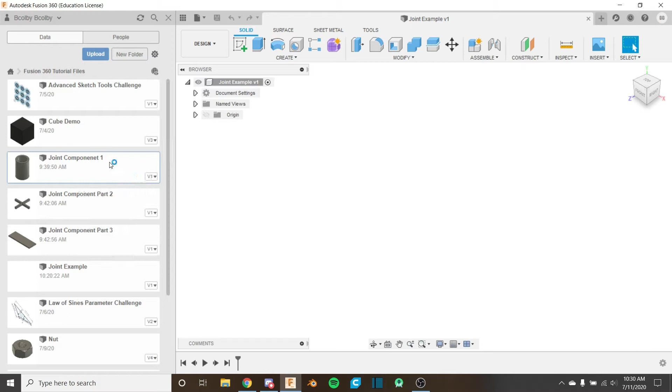The way that I bring these into this file is I right click on them and do insert into current design. It gives me some options about where I want to place it. I'm just going to leave it at the origin for now, and I'm going to click OK. Now you'll notice that we have a component here. It's not under the bodies drop down or anything.

But if we opened up this file, you would notice that this is a body in fact. So when you save a file and you insert it into another file, it automatically becomes a component. If I changed this body here, if I made it taller or shorter, there would be a way to update it in this example. We'll be getting more into how to manage components and sub-assemblies in the assembly tutorials. But for now, let's just stick with this.

So the next thing I'm going to insert is this joint component part 2, and I'm just going to drag that out so we can see it, just like that. And now let's talk a little bit about what joints are. You may or may not be familiar with the concept of joints.

So basically, when you're creating a robot, for example, you need everything to stick together on the assembly. You need all the parts to be together in a realistic fashion, and that's not always just making them rigidly connected together. Sometimes you want movement, sometimes you want it to rotate, sometimes you want it to slide, and this is a way of creating those realistic interactions between different components.

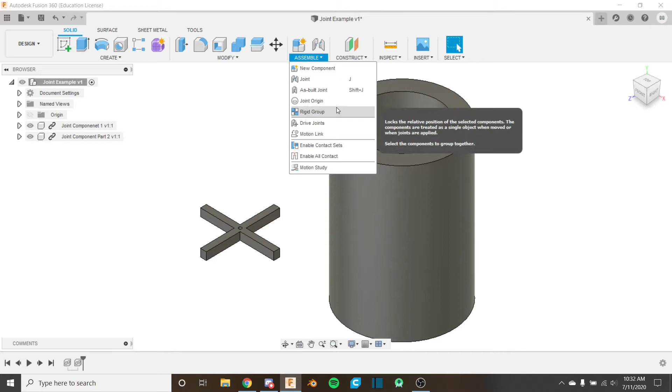So we're going to be looking at 4 joint tools today: the joint, the as-built joint, the rigid group, and the ground, which is not in this menu, but it's inherently tied into joints.

I'm actually going to start with ground, and what ground does is basically lock a component's position and rotation. This can be important. For this, I want my cylinder to be locked in place, and this is going to be our moving piece. We can pretend this is maybe welded down onto the ground or something.

The way that you do that is you can double click to select the component, right click, and press ground here. Then you'll notice it has this little pin icon here. You can also right click here, and if I clicked unground, it would be ungrounded again.

So if I ground it and I tried to move it with the move tool, you'd notice that if I put this on components, I couldn't select this one, but it would let me select this one. If I ungrounded this, I could select it and move it.

So that's it for the ground. It's really simple. You should really only ground one part in the assembly if everything's connected. Just ground the piece that makes the most sense if you need it.

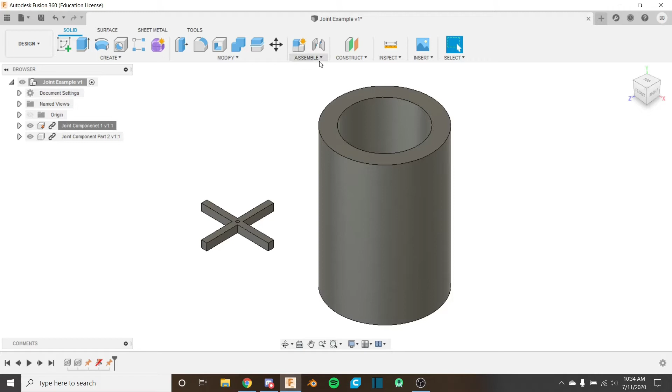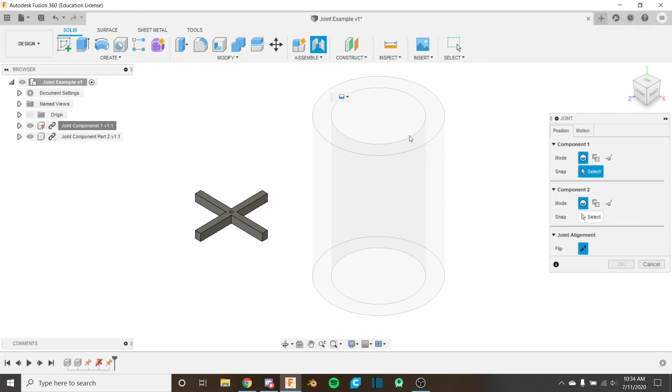Let's start off with joint. So I'm just going to do the joint tool right here. The command is J, and it's here, up here, and it's down here. So the first thing that it asks for is component 1, and component 1 is going to be the one that's moving. So you always have to remember component 2 is the rigid one, and component 1 is the one that's moving.

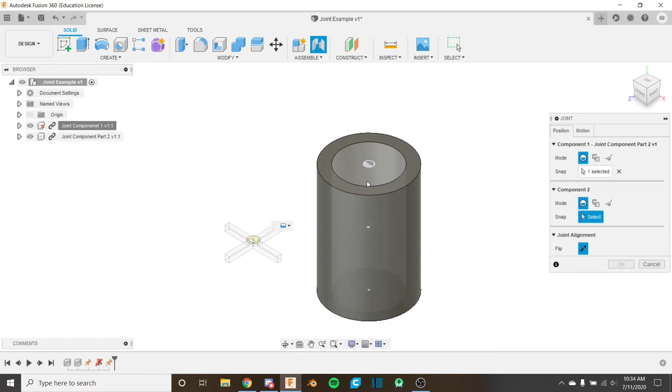So I'm going to select, when you hover over this you can see some points, and these are just points of selection. I'm going to select here, and you'll notice that it's snapped there with the yellow sort of circle thing to the center, and that's right where we want it. It's the center of the circle. Now we can select a point to snap to here. Again, I'm going to select the center of this circle, and now you'll notice it's brought it over and it's doing some sort of shaking animation.

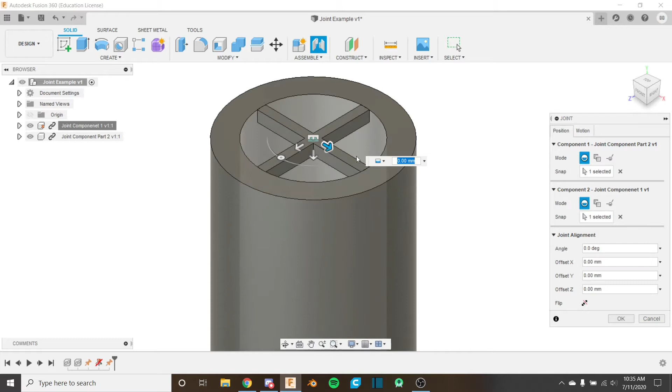So let's take a look. There's a lot of stuff here. It's really not that complicated. These options here, the simple mode is just the one I use the most to select components and where to align them, but sometimes it can be useful to use the between two faces and two edge intersection tool.

This is pretty easy, especially in their picture here. You can see that they have a sort of filleted part, and if you want to align the corners of a filleted part with a non-filleted part, for example, you wouldn't be able to select it there, but if you use the two edge intersection tool, you would be able to. And you'd be able to select the edges that define the fillet, and then it would give you the point in the corner. But really, the simple is mostly what you need in FTC, as the selections are quite simple and the geometry isn't too complicated.

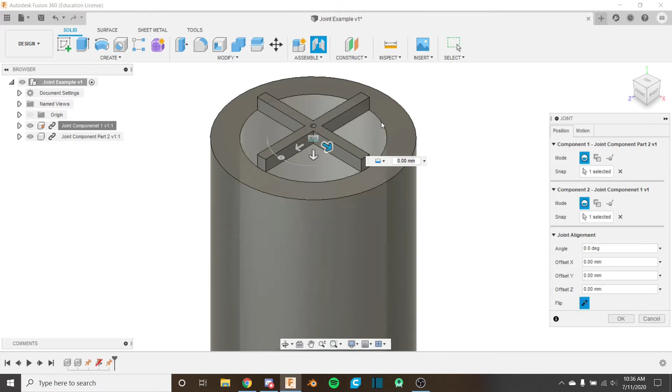So the first thing that we're going to look at is the joint alignment tool. So we have some options here. So flipping it, we'll flip it over the XZ axis, which we defined on our point. So our point that we are snapping to is on the XZ axis, so it's flipping it over just like that. You can see it goes down and it goes up. So it's important to make sure that your piece is on the right side. I'm going to have mine down below like this.

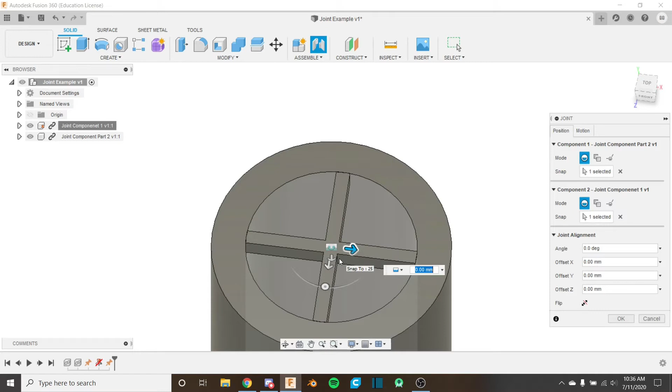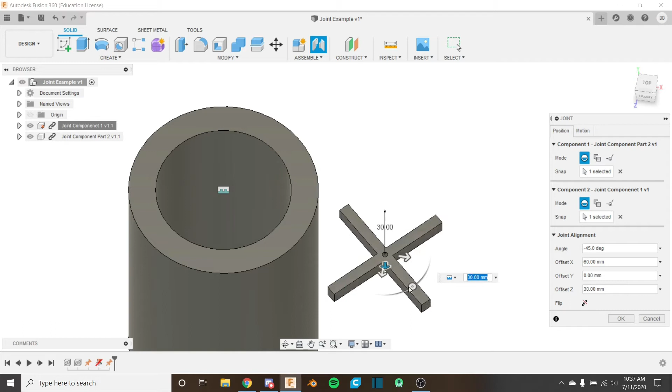Then we just got some angle, and this adjusts the angle around the point that you're snapping to. Just like that, you can change the angle. So if I want mine at 45, I put it at 45. And then the offset X, Y, and Z allows you to offset the part. And now it looks like these two wouldn't be connected, but in fact, we still have a rigid connection between them, even though we've offset it. So I'm just going to put this back at 0 and 0, and we have it back there.

So let's take a look. When we first animated that, it gave some sort of shaking thing, and that's because we have the rigid joint selected, and this means that there's a rigid connection between these two components. You can always just click here in the animate to preview how the joint is going to work. When you're using a joint tool, you select the type of joint by clicking on these options down here. That's basically it. So we're starting with the rigid. By default, it's rigid, and we've just got a rigid connection between these two joints.

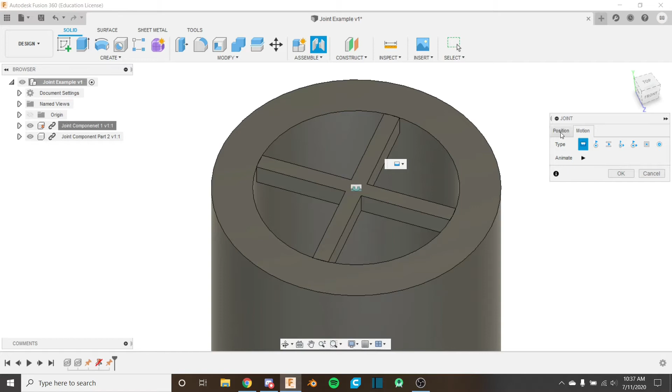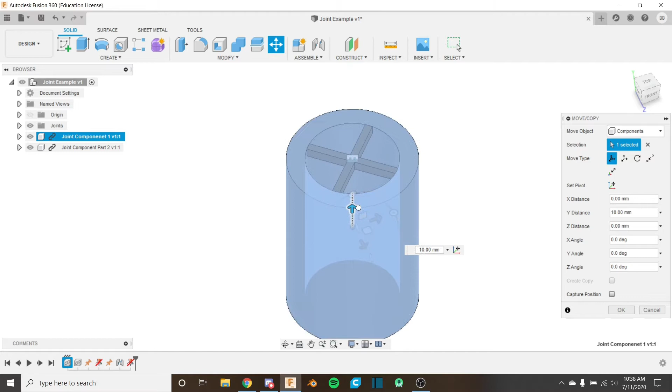So if I click OK, you'd notice a few things that would happen. One, we've got this sort of white and blue puzzle piece thing here, and we got another drop down over here. So I'm going to unground this for now, and we're going to take a look at what happens if I move the cylinder here. You'll notice that it's moving together and it's staying at that point. And because we've used a rigid joint, the position and angle is now locked in.

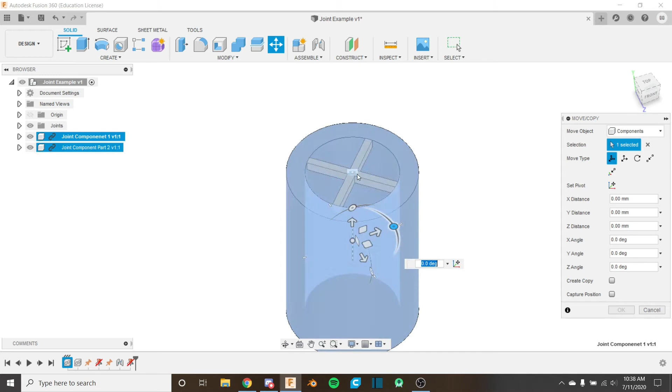So if I rotated it, you'd notice that both the cylinder and the little X thing are rotating together. So that's what the rigid joint has done. We've defined a rigid connection at the points that we specified and at the position and angle we've specified, just like that. And you can hide the joints by just clicking here, and you can also look in the drop down here to find the joints individually and hide them.

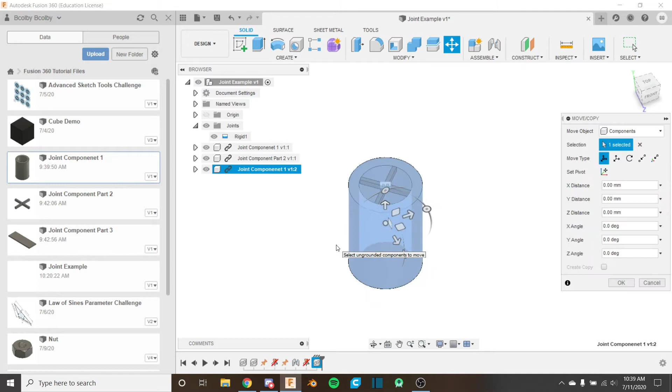Next, let's take a look at the revolute joint, and I'm going to add some more components in to use for this one. We don't want them to be on top of each other, so I'm just going to move them over just like this.

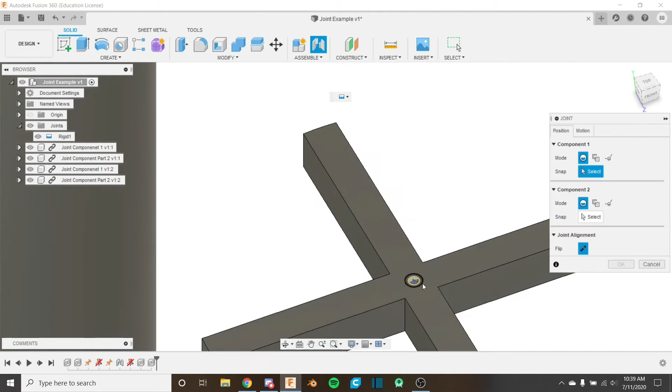And you're going to be doing this a lot if you have robot assemblies, getting your pieces in together with the insert component. Same thing, I'm going to select joint or press J. I'm going to select the center of this, the center of this.

Instead of doing the rigid joint, I'm going to go to motion and change this to revolute. And we have an option here. Right now it's rotating around the Z axis.

There are some things we could change about this. We could change the rotation, so now it's rotating like this. And now we also have this axis.

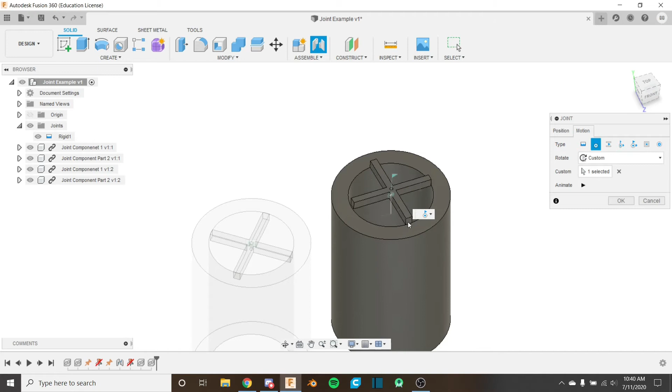You can also use a custom axis, and for this you'd have to select an axis to use for the rotation. So if I selected this, for example, it would be rotating around that, and it's kind of like moving up and down. That's because the axis isn't going straight through.

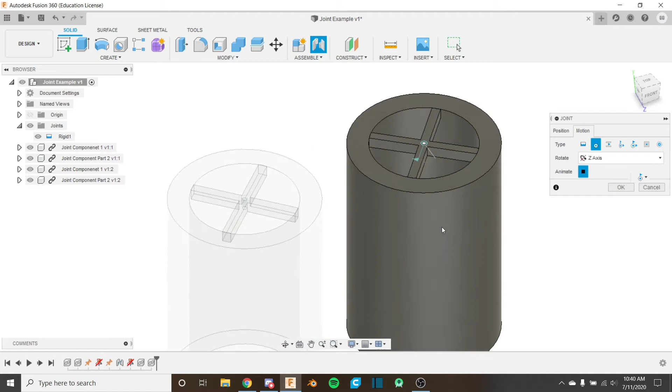You may have noticed, why when I select Z, it's rotating like this, but the Z-axis is facing this way. Isn't this the Y-axis? If we look from the top, isn't this the Y-axis? That's because this is for the part, which is the Z, X, and Y for the individual part.

So just like that, you can use custom axis or construction axis. We learned about how to do that. And that's the revolute joint. Again, you can do the offsets and it still works, just like this.

If I went to motion and animated it, now we're rotating around like this. It's not rotating in place off to the side here. So you can use the offset tools and get the rotation correct. If there's no offset, it's going to be rotating the part and it's not going to be orbiting at all.

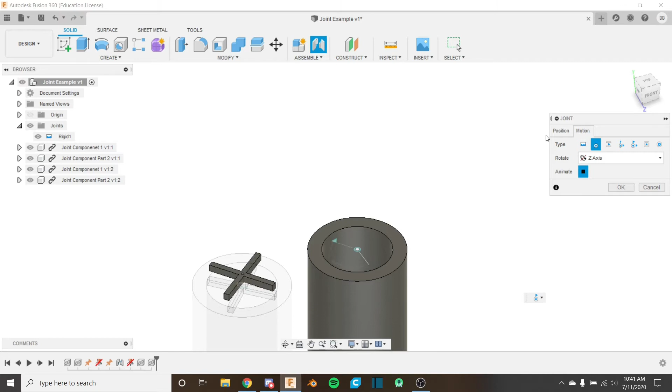So I'm just going to put this back on 0 and 0, just like that. And we click OK, and now we have our revolute joint.

Let's say you wanted to preview this joint motion again, there are some ways you could do it. If I right click here and click drive joints, I can actually specify the angle for this joint to be driven, and that will change it in the model.

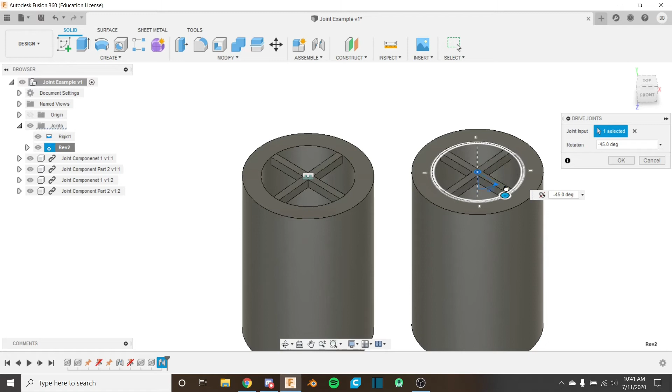So if I went -45, it would actually change it just like that. If I went Control Z, it would snap it back. That's one way to see the joint working.

If we did animate joint, you would see it rotating, and if you did animate model, you could also see it rotating. The difference between animate joint and animate model is animate joint only shows the movement for that joint. If I had something rigidly connected on top, animate joint would just show this thing rotating around. If I did animate model, it would include all the joints in the model and how they interact.

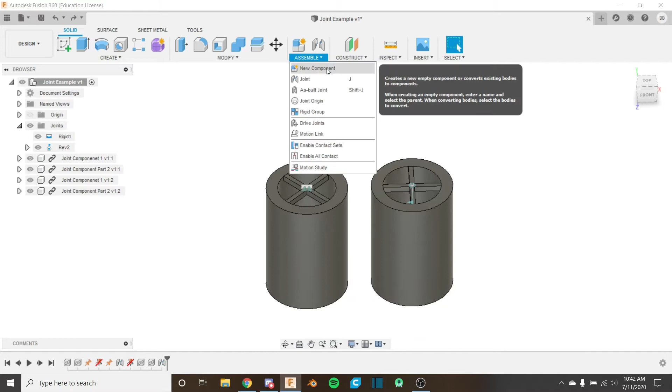Next, let's take a look at the slider joint. So I'm going to bring in some new pieces, bring them over just like that, and bring in our part 2, bring it over just like that.

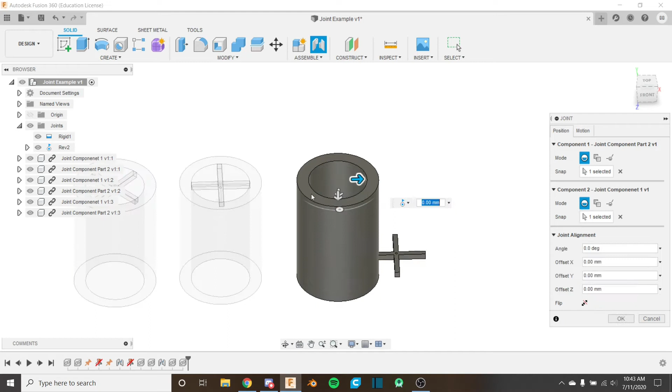I'm going to hit J for joint, and I'm going to select the center of this piece as the piece that's going to be jointed, and this piece here for defining the joint. It's still on rotate or revolute, so I'm going to change it to slider here. What the slider does is it moves it up and down along an axis.

So we can change the axis here for it to move along. If we selected X, it would move this way. If we selected Y, it would move front and back like that. And again, you can use a custom axis for it to slide along.

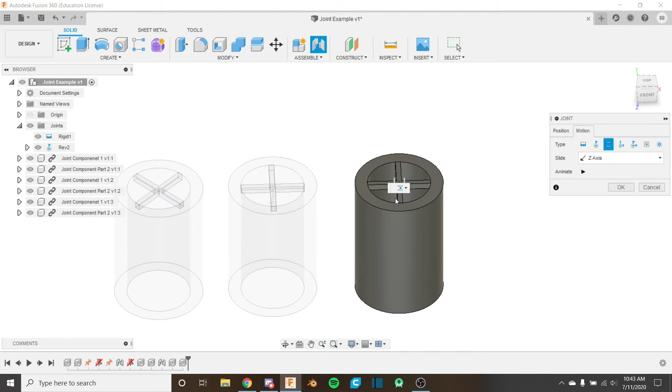But I'm just going to keep it on the Z right now. I'm going to have it sliding up and down this cylinder. Again, we have our same tools for the offset and the angle and the flip. Flip, we know how the angle works. If we do the offset, nothing strange is going to happen here.

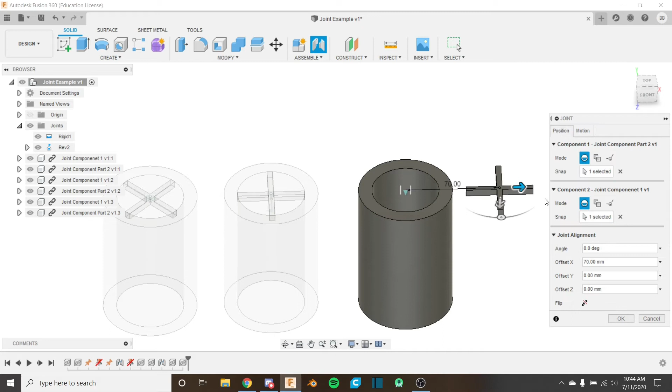It's just going to move up and down to the left and the right, or the front and the back, however you do it, just like that. And we can bring it back to 0, because I want it sliding up and down this cylinder. I'm going to click OK, and now we have our slider joint.

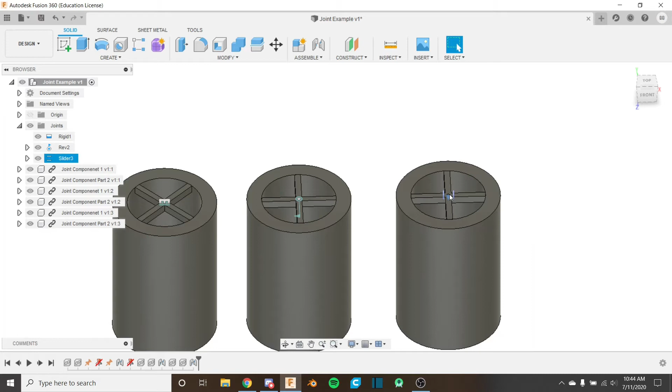You may have noticed that each joint has its own special symbol that you can see. You should get familiar with those symbols so you can quickly see which joints are where on an assembly. The sort of puzzle piece is a rigid one, the flag is a revolute, and the down arrow with white bars on either side is a slider.

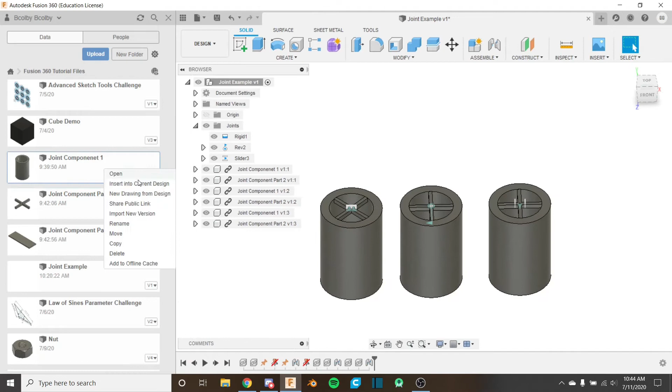Next, let's take a look at the cylindrical joint. I'm going to bring in some more pieces here to work with, just like that. This can also often be a monotonous process, bringing in all the pieces to work with, as it's quite slow and you have to go through the menu and find where you've saved all your pieces.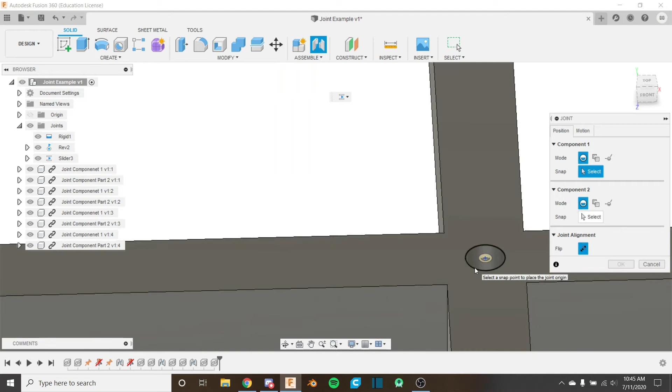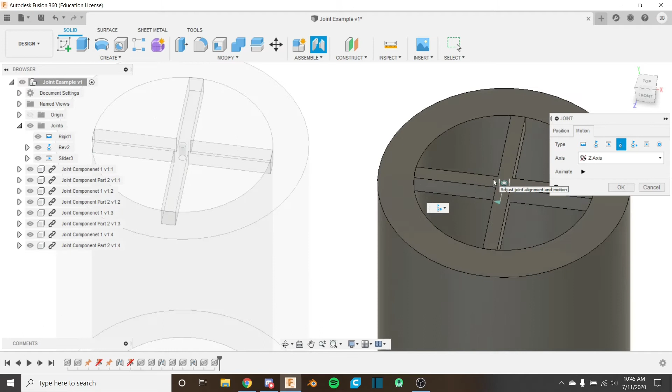So again, J for joint, click there, and I'm going to select this and this as always. For the motion, I'm going to change this to cylindrical. Now you'll notice this is our first combination joint, which is really just a revolute and a slider combined. You can see that by the symbol here - you've got the slider white lines with the arrow pointing down, and the revolute flag. We can see for this one that there's only one axis you can choose, meaning the axis of rotation and the axis of sliding is the same. That's what it is for the cylindrical joint.

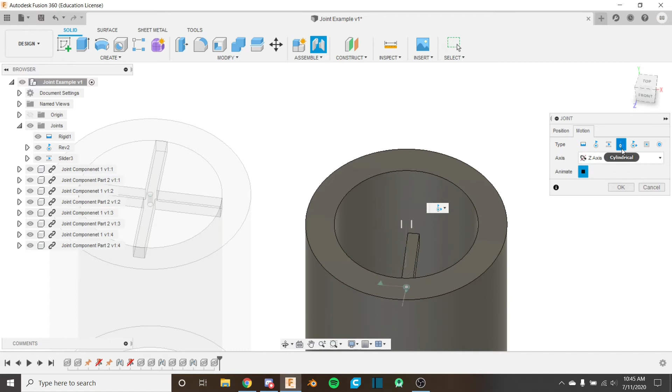The pin slot, which we'll be looking at next, these are different. So if I change this to Y, it would move along the Y and it would rotate along the Y. Again, we have our X, Y, and Z and custom. I'm going to leave this right there, and we have it like that.

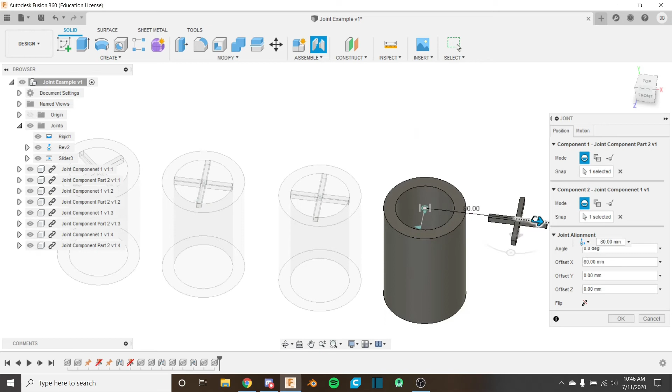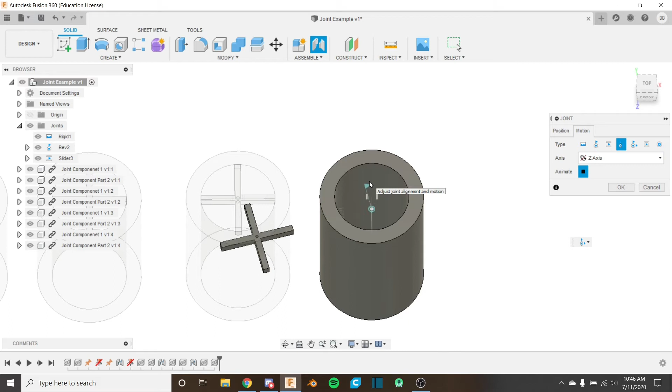Now, if I offset it, we can take a look at how the joint behaves. What you'll notice is that if we look from the side, we can see that it's sliding up and down, and we've got that orbiting, rotating movement going on. So whenever you're offsetting a revolute joint from the center point, you can sort of think of this as like a planet rotating around a star or something. So I'm going to stop that, and bring it back to 0 in the middle. Now we have a few more joints to look at.

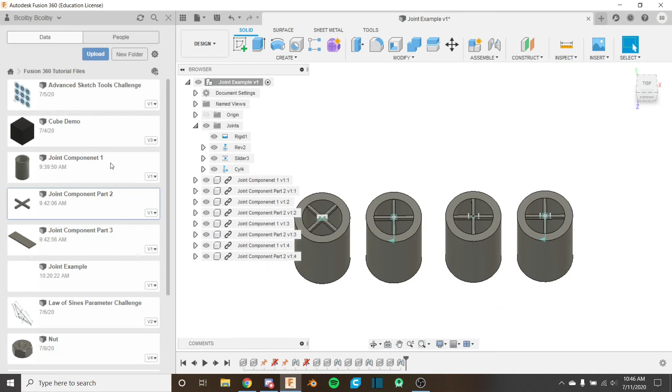I'm going to bring in my parts again, just like this, slide them over. And let's take a look at the pin slot joint.

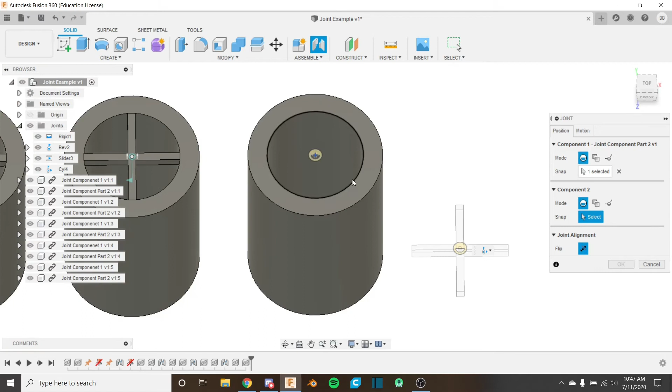This one's similar to the cylindrical joint, except that the axis of rotation and the axis of sliding is different. But again, it's a combination of the rotate and the slider. So if we hop over here into pin slot, what you'll notice is now we have two different axis selection menus here. Since this one is on Z, the rotate is on Z, it will not let me choose Z here. This is because you basically can't make the pin slot behave like a cylindrical joint - the axis has to be different from the rotate and the slide on the pin slot, and it has to be the same on the cylindrical. So it's something to remember - if you're ever like, why can't I select the Z here? It's because you're in pin slot, not cylindrical.

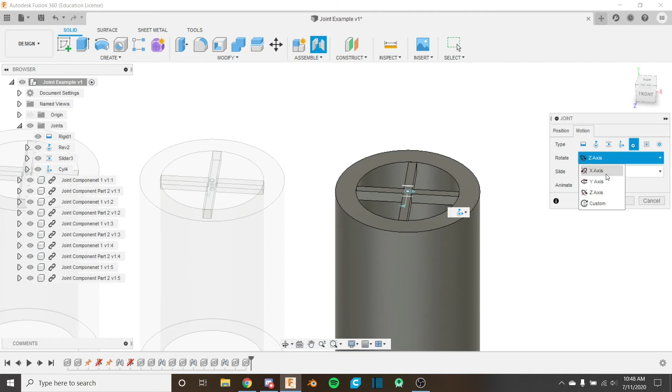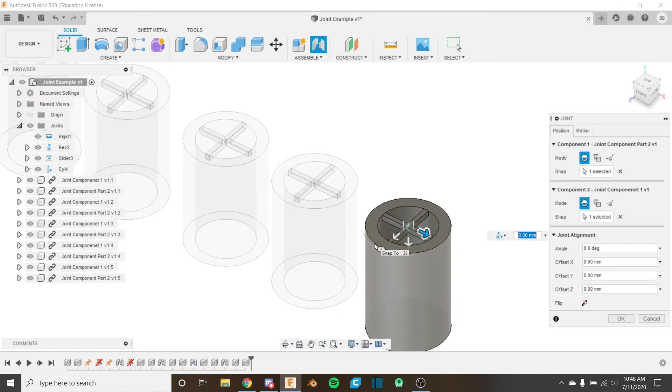So if we take a look at what will happen if we are sliding on the X and rotating on the Z, it's about as you'd expect - we're just moving left and right and going like that. So what I want mine to do is go up and down and rotate sort of sideways. So for the rotating, I'm going to choose X, and the sliding on Z. If we preview that, you can see that it's moving up and down, and it's rotating like this. It's a pretty complicated joint with the varying axes. Again, we have our offset tools, we know how all of that works. I'm just going to click OK, and now we have all of this.

So the next joints we're going to be looking at are the planar joint and the ball joint, and these are pretty complicated. I don't think I've ever used them in an FTC robot, but it's good to know how they work. Especially the ball joint is really complicated.

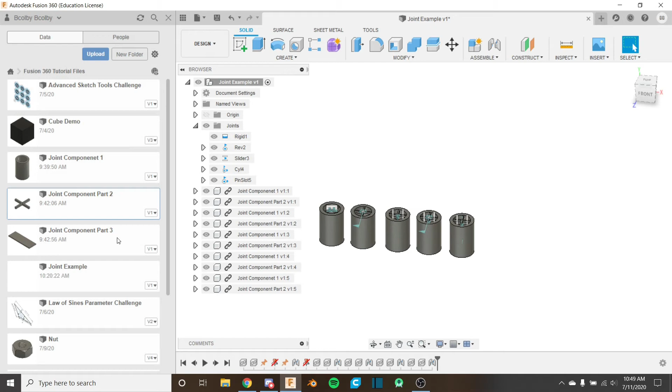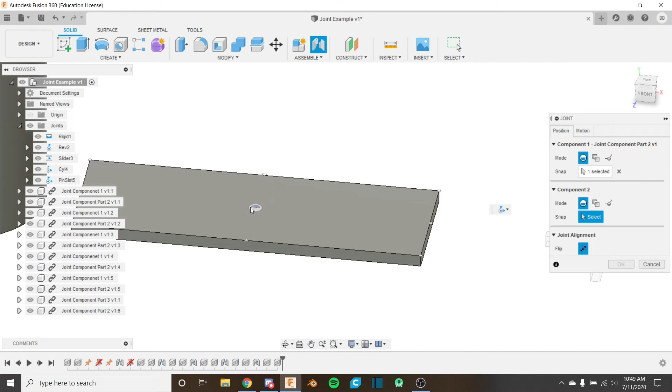So I'm going to bring in this, and this is going to be the base for our planar joint, and then this, as always, is our moving part. I'm going to hit J for joint and select the center of this, and I'm just going to put it at the center right here. It's snapping to the center, and we can go to motion and choose planar, and I'm going to flip this over so it's on top. Now it's important to preview the motion so you have it correct.

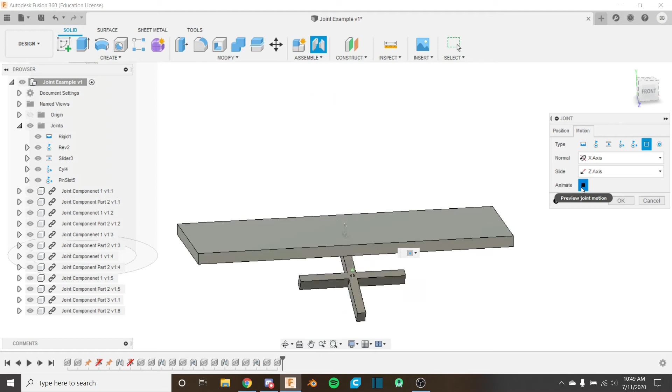So what it wants us to do is select the axis normal to the plane. So this is not the x-axis. If we change this to the one that's correct, which is the z-axis as our normal, then you can see that it's sliding along this plane just like this.

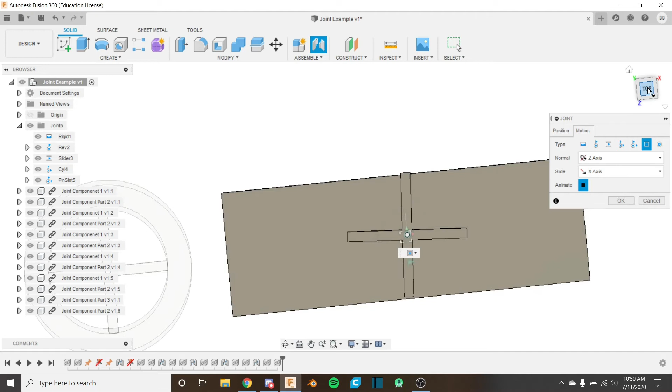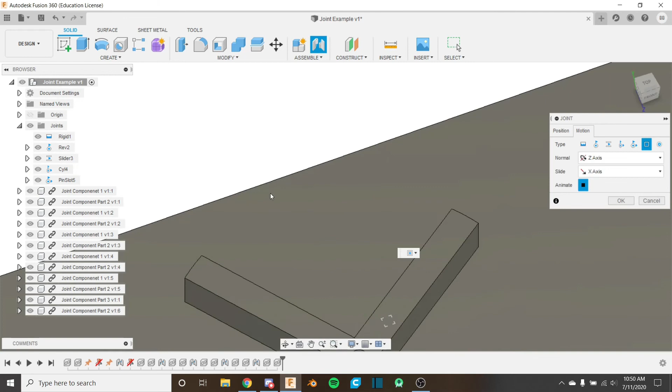There's some options you can have here. You'll notice that it's actually these numbers here - it's sliding in the x and the y simultaneously, and it's also rotating. So we could change this to custom, but this is how it is for now. This one's pretty complicated - I don't know what you would use this for on an FTC robot, as you don't often have this sort of thing where it's moving in both the X and the Y and it's rotating.

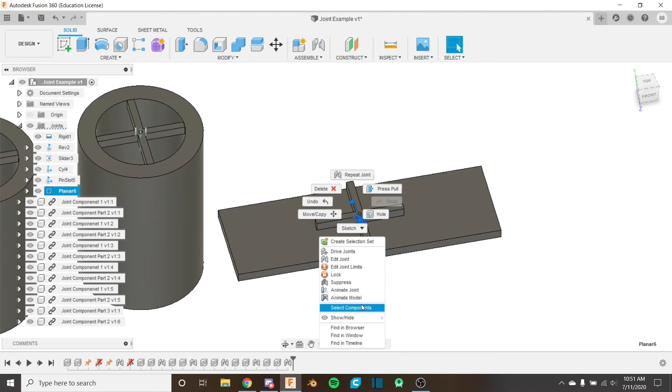But it's good to know anyways. So I'm going to click OK, and if we animated this joint, you could see that movement just like that. You can press escape to end this at any time.

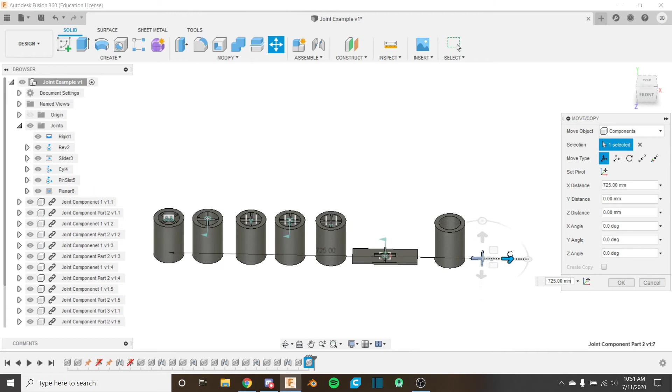The last one we're going to look at is the ball joint. I'm going to bring this back in. The idea for the ball joint is that it's sort of like 3 revolutes combined into one on the same point. The planar was 2 sliders and 1 revolute, or you could think about it as a pin slot and a slider.

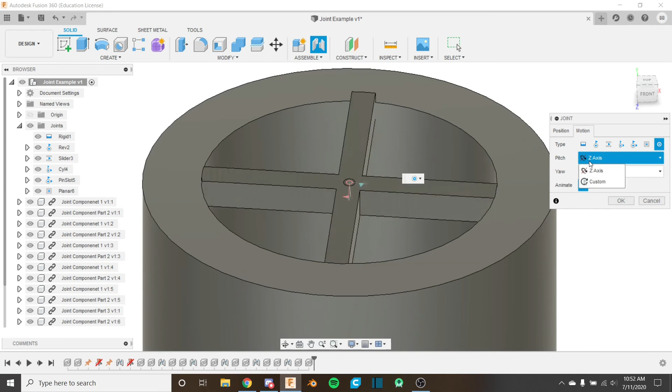So I'm going to hit joint, select our pieces just like this, and for the motion I'm going to change this to ball, and now you can see we've got this gimbal action going on, where it's moving in all 3 at once, and we can change which one is the pitch and which one is the yaw here. We can select custom axes for these, but it already knows that X and Z is correct for our setup here.

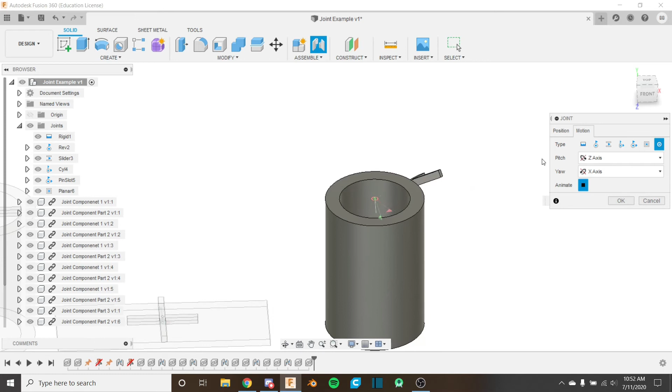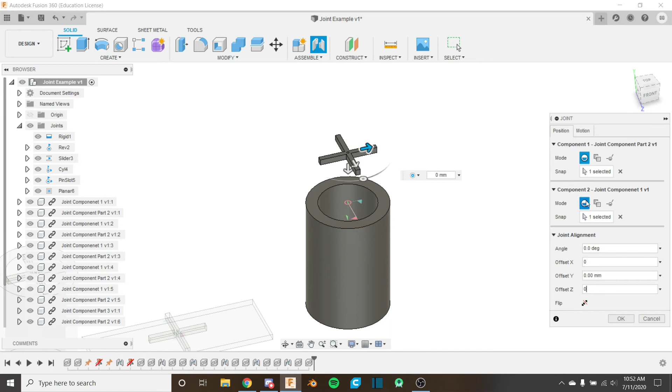We could do some offset here and take a look at what that's going to be like, and again we're going to have our orbiting action going on here. So it gets pretty complicated to visualize how this is going to work without actually seeing it, once you start doing offsets with the ball joint, just like that. So I'm going to put everything back on 0, and it's just going to rotate around this center point here, just like that. This could be some sort of joint that can move in all directions, like a ball joint.

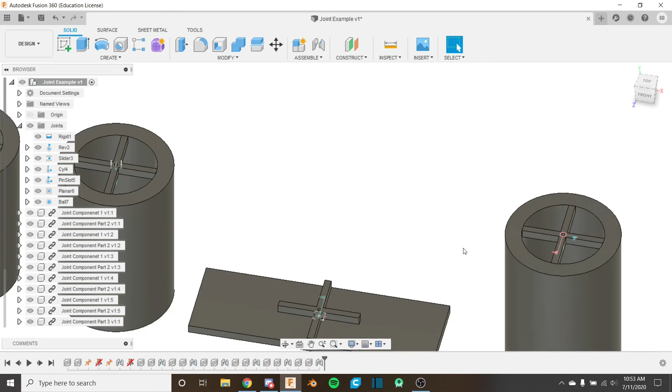And I click OK, and you can see the symbol here is 3 revolutes. In the planar, we've got like a pin slot and a slider. So that's our 7 joint types that we've taken a look at.

Next, we're going to take a brief look at the as-built joint and the rigid group, and then we're going to call that the video for today.

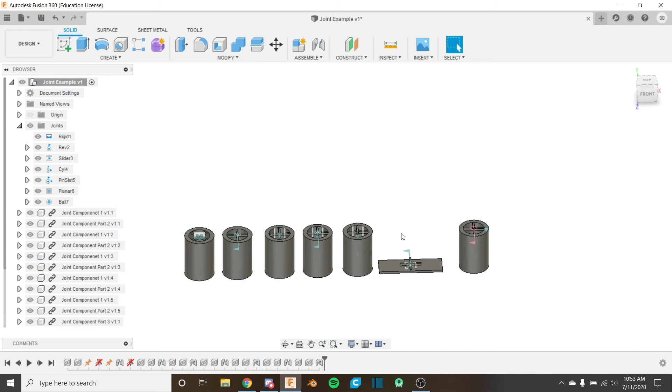So with these joints, what you may have noticed is that when we select the points for our jointed part to our receiving part, it moves the piece into place. It was moving this X piece into place every time. With the as-built joint, that's not the case, and what it actually assumes is that you've already aligned everything in place how you want it to be.

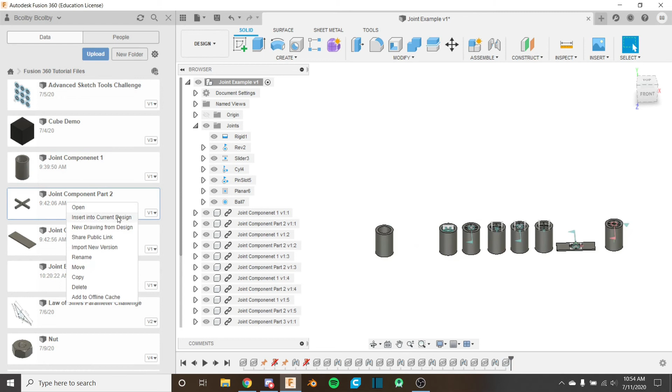So I'm going to bring in some more parts here to work with. We're not going to look at all the joints in the as-built joint, as they are the same as the other joints. We're just going to take a look at how you use the as-built joint. So if I want to joint this with this, I would just use joint.

But if I look in as-built joint, which is Shift J by the way, all it's asking for is some components. It's not asking for a position on those components, because it assumes you've already aligned it. So if this is where I want these components to be rigid grouped, if they are rigidly connected here, then I would just select these joints, and you'd notice that it's rigid grouped them, and we don't have any options here like offset or angle or anything. It's already assumed that you've aligned it the way that you wanted to.

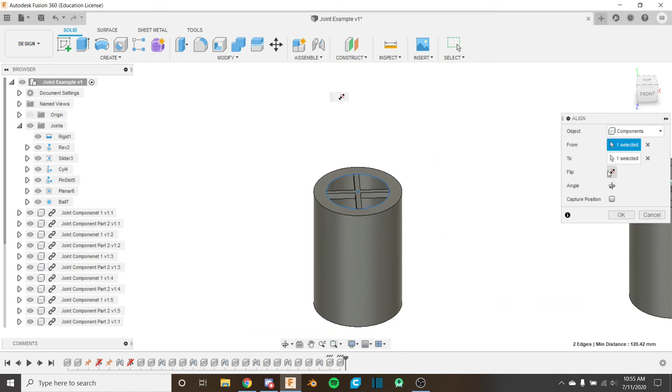So let's take a look at how to align this. There's a tool we haven't looked at before, the align tool. Basically, you select a point on the first one you select, which is the moving one. The second one you select is the one that's going to remain stationary. You select it just like the joints. Go like this, go like this. You have the flip option and some angle and stuff. So if I moved it just like this, now we would have it aligned.

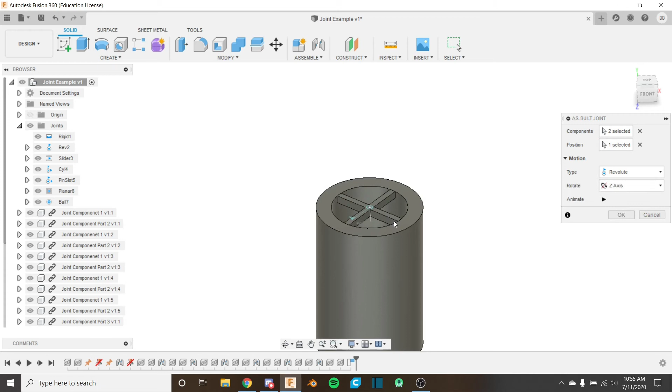And now I could use the as-built joint, and use, if I want to do revolute just like this, then the last thing I would have to select, after selecting my components, is just the position to revolve around. And just like that, now we would have it revolving around this.

There are some situations where you need the as-built joint, or it's easier to use than the normal joints, but I do recommend using the normal joints as much as possible, because the as-built joint sometimes doesn't update correctly. If I change this part, the align tool might not have worked properly, so the as-built joint will be in the wrong place. Whereas the joint tool is always based around this geometry. So I selected this top point here.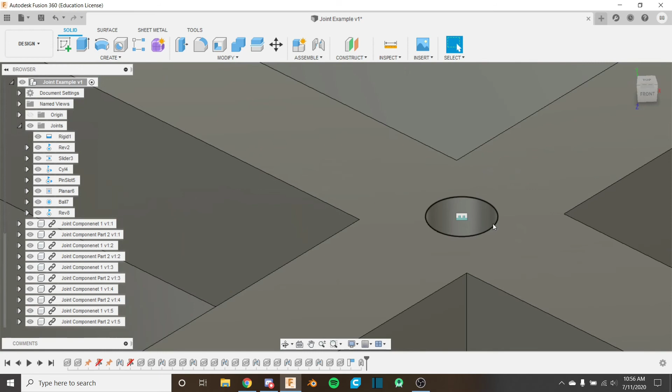If I made this top point taller, it would update properly. And so I recommend that you use the normal joints as much as possible. But there are definitely situations where you need the as-built joint. So that's it for the as-built joint.

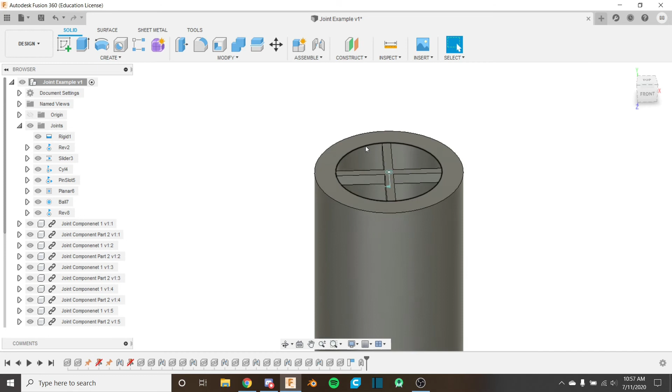You just select your components, and then it asks for point of rotation, point of axis of sliding, whatever it needs. So pretty simple. You're just not defining position or angle or anything with the offset tools that we were looking at before. And the last thing that we're going to work with is the rigid group.

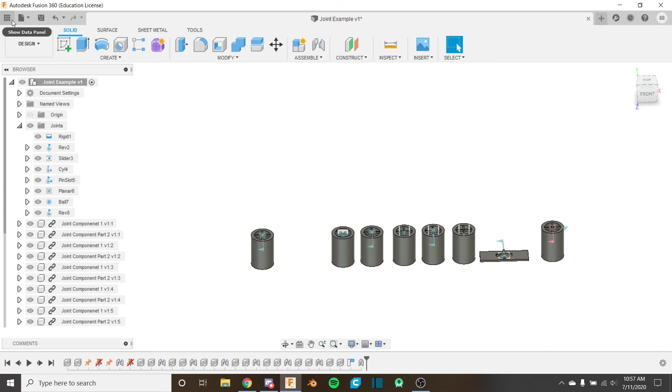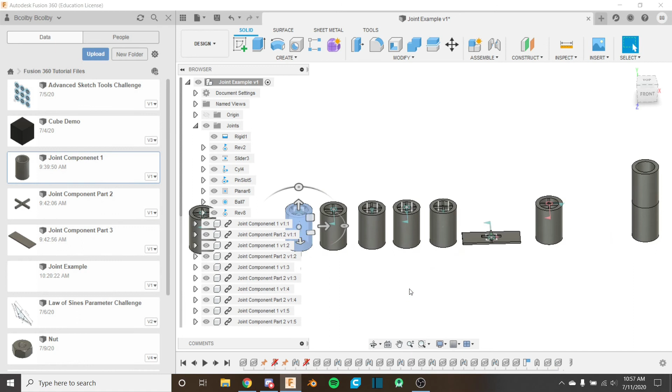And this one, it's really tempting to use when you're just creating a robot. Basically, you're just connecting a bunch of parts together. Not with a joint or anything, you're just making it together. So if I went like this, and I'm going to make a sort of stack here of cylinders. I'm going to bring this one up just like this. So we're going to have 3 stacked on top of each other. Bring this one up to 200. Now we have 3 stacked on top of each other, and I want these to be rigidly connected.

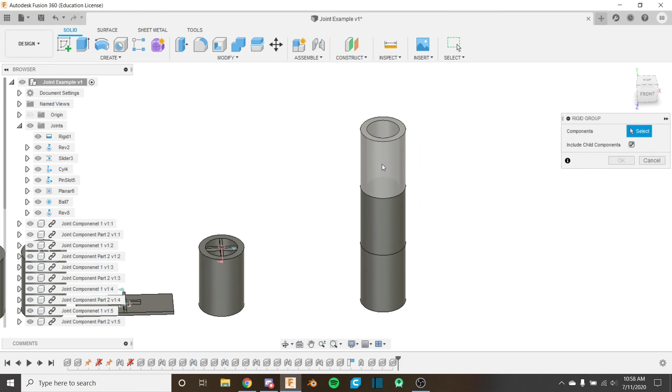The rigid group tool allows you to make these so their position relative to each other is fixed. So you just select as many components as you want. There's no other options. It's basically an as-built rigid joint, but between multiple pieces. So if I went OK, and then I did a move on this, you would notice that they would all move together.

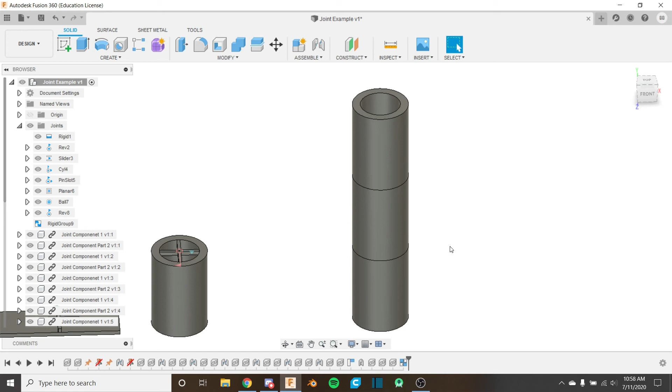Now, this is really tempting to use when you're first creating a robot, to align all my pieces together and then just rigid group them all together in one big rigid group. If I have 100 pieces that I want together, I just use the rigid group. But that's not good practice when you're creating a robot, and that's because the rigid group does not join geometry. If I went back and I changed this piece, this would all be messed up.

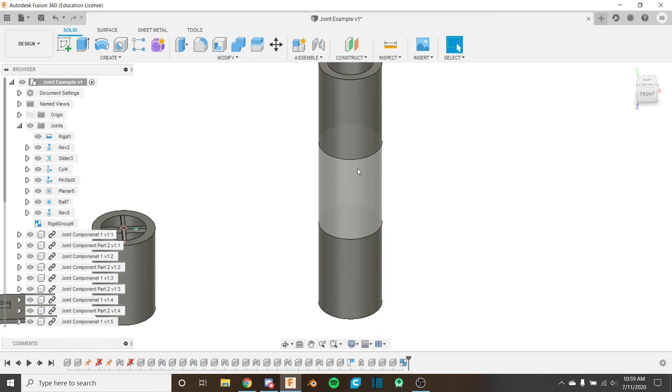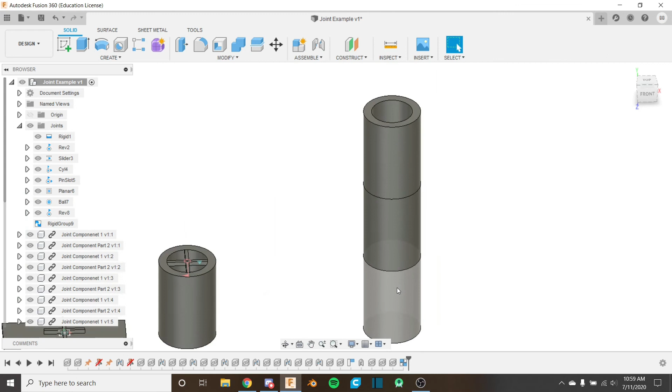So it seems like it saves you a lot of work using either the as-built joint. I could have used the as-built joint between this one and this one, and this one and this one, or I could have just brought them in and then jointed them properly. But it really can create a lot more work down the line. So I highly recommend that you stay away from rigid groups as much as possible. It can be useful though.

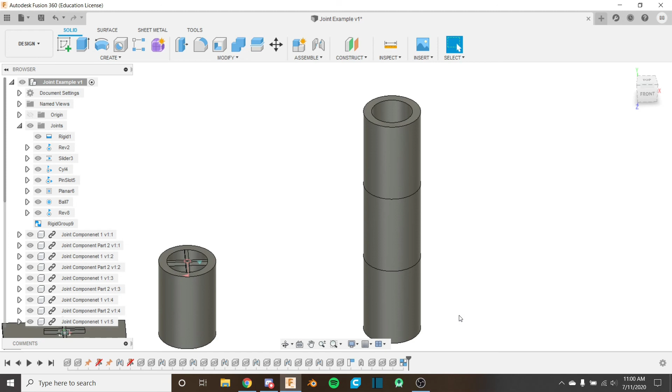For example, if you're inserting a component like this cylinder, but instead of just being one part, it has a bunch of parts, and you just want to put it together so you can see how it aligns, and then you're going to go back and put the joints in the sub-assembly that you inserted, that can be a good use, just to get everything so you can move it together and align it together. But that's the rigid group tool.

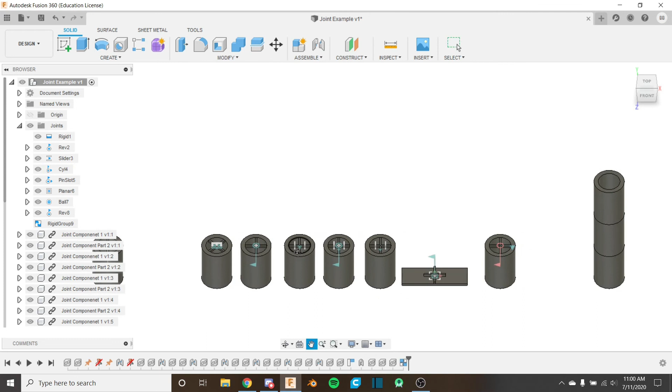And that's all for today's video. We covered a lot of ground today, how to use these joints. So if you want to create a joint, you just pick the one that reflects how that is going to perform in real life. And it's honestly pretty easy to decide how it's going to work.

Like a gear, it rotates with an axle. So I'm going to rigid joint it to the axle, and then the axle is going to be driven by the motor, so it's going to revolve with the motor shaft. Pretty easy stuff like that. It's pretty easy on FTC robots just to think about how everything is going to work. There are some instances where it's harder, like linkages or sliders. It can often be hard.

So in the next video, we're going to take a look at the remaining joint tools. So we're going to be taking a look at the contact sets. We're not going to be taking a look at the motion study for kinematic motion analysis, as this is just way too complicated for FTC, and it's not really necessary at all. You're not going to have kinematic motion in FTC, so we're going to skip that.

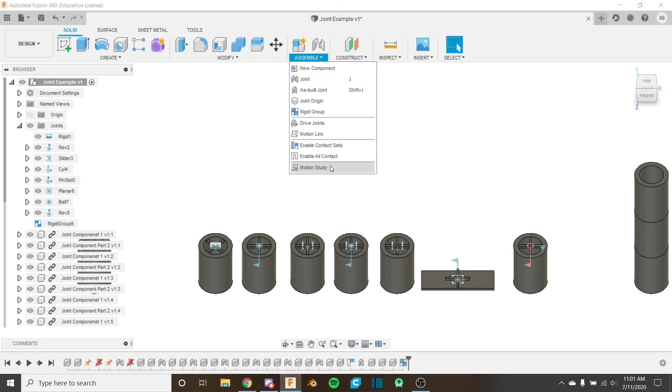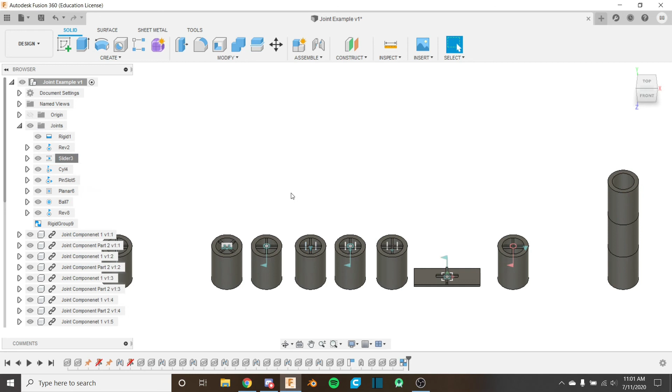We're also going to take a look at, you may have noticed the thing is going outside the cylinder in some of these. It's going in the sliders, it's going above, or it's going too far below. So we're going to be looking at how you edit the joint limits so it doesn't go too far. And then after we've looked at the contact sets and the motion link, we're going to be putting the joints on our screw and nut. So that's going to be very exciting.